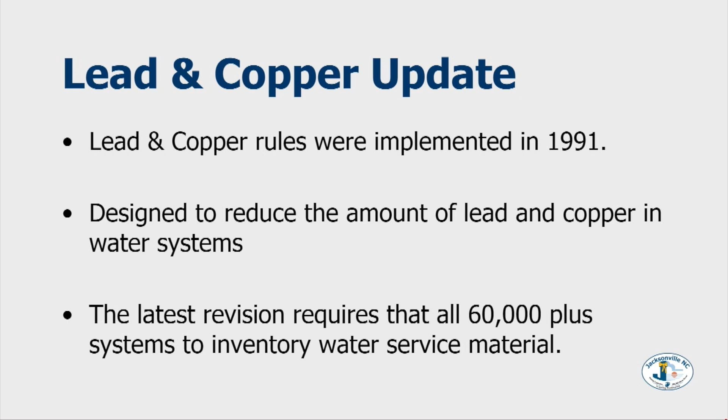What we're doing is going on both sides of the water service. Our service line would be from the street where the main is up to the water meter. So we're doing inspections on that section as well as on the homeowner's side. Typically what we'll do is excavate a couple of feet on each side to expose their water lines as well as ours to inventory what material it is.

And like I said, we're looking for lead and copper because lead has contaminants in it that stunt growth for children and cause learning development issues and so on.

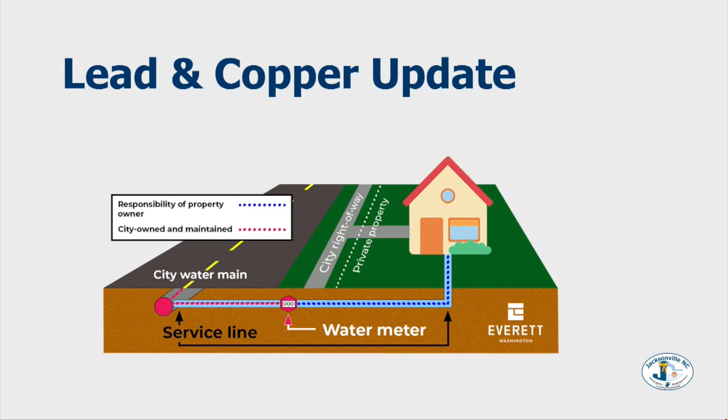So with TJ's example here, we appreciate Everett, Washington for providing such a great example. But in this example, it's important to note that we're checking both sides of the meter where we can easily get access, which is typically a grassed area. There may be a few where we have to go into pavement if the meter's right on the back of the curb or something like that. But what we're not checking is inside a house. So we can check our side of the line and there not be anything, but that doesn't mean a house built in the 40s, 50s, 60s, 70s, or early 80s doesn't have lead plumbing or lead solder inside if they have copper pipes. So it's still not a complete solution, but it will be better.

Also, since lead and copper affects children more so than healthy adults, we've made it a priority to check all of the schools, all of the daycares, and primary care clinics for youth and pediatrics, and get those out of the way so we know definitely, because it's more effective for the children.

So, does anybody have any questions on the lead and copper update? Answers are that. Thank you. All right, thank you, TJ. Thank you for having me.

Good evening. First thing I'd like to do is give you a quick rundown of the capital improvement plan. As you probably already know, it's a 10-year planning horizon for this next cycle, for fiscal year 26 through fiscal year 35. This plan is updated annually and is used for evaluating water and sewer rates.

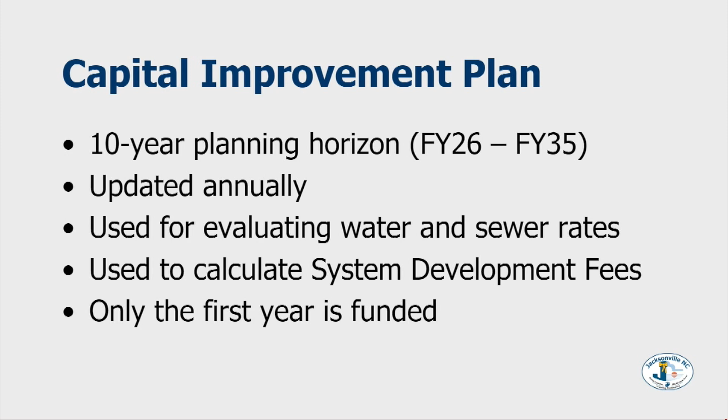What constitutes a CIP project? It's a project that takes longer than 12 months to complete. The cost exceeds $50,000, and its useful life is greater than 5 years. Replacement and repair is based on work orders, and new infrastructure and upgrades are based on growth and demand.

There are different types of CIP projects that we put in there. The first is rehabilitation, then improvement, as well as growth. Rehabilitation projects repair and extend the useful life of our infrastructure. They replace deteriorated infrastructure, keeping it the same size and capacity typically, and the source of revenue for those projects is from the monthly water and sewer rates.

Improvement projects also replace deteriorated infrastructure, reduce pressure on the existing infrastructure, and have the potential to add system capacity. They provide for existing and future development, and the revenue sources used to pay for those projects are monthly water and sewer rates, as well as system development fees.

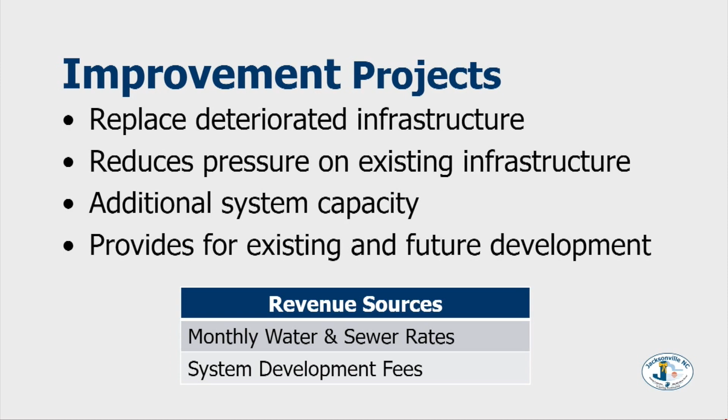Our third type of project is growth projects: new infrastructure, additional system capacity, and again they provide for future growth. The revenue sources for those projects are system development fees and water and sewer service area fees.

And what we're going to do now is go over the current projects update. Next month, we're going to discuss more of the next fiscal year's projects in the CIP, and then review a draft in November for any questions you all have, as well as to get any recommendations you may have. And now I'm going to turn it over to Randa, and she'll start off with water projects.

Good evening, all. You're going to see a lot that you've seen before, some maybe not, but the first project I'm going to discuss is the Black Creek Well Replacement Project. As you all might remember, this one was already designed. We had to go in there and do the chemical analysis, and we found fluoride. So we've had to put this project on hold while we look at other alternatives that are available. That includes evaluating some other wells and options, and doing a study for the new ground storage tank.

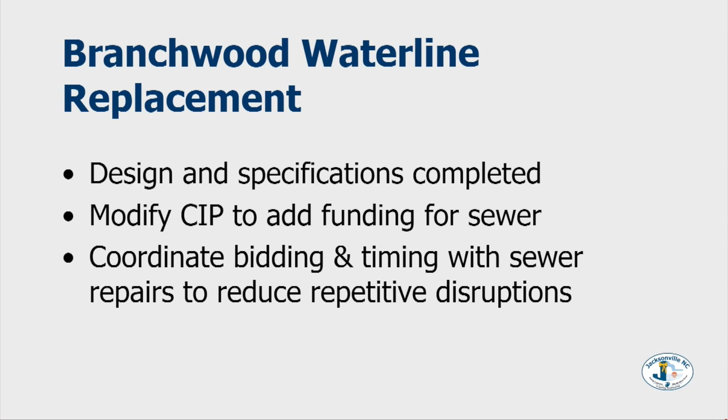Our Branchwood water line replacement project is to replace the water service lines out there in that area. We have it designed and ready to go. However, we also have some issues with the sewer infrastructure out there. So instead of tearing things up, coming out, and then having another contractor go in to do the sewer repairs, we decided we're going to try to coordinate that. We also need some additional funding in order to do that, so most likely it won't be until next year.

The challenge with that project is we would have gone in, replaced all the water service lines, left, patched anything that needed patching, left, gone back, made all the sewer repairs needed, patched everything, left, and then came back and resurfaced streets. So we would have interrupted that area's life a minimum of 3 times for extended periods each time. If we're going to do that, we might as well just disrupt their life one time.

Well, you say it costs you more, but if you do it 2 or 3 times, won't it add up to about the same, or even cost more that way? Well, it'll cost us more because, I guess you could argue we should get some economies of scale maybe, but a lot of it will be sub work anyway. And the challenge will be, instead of breaking streets up and getting to them over periods of time, we'll have to consolidate it all into one project. So it will be money we hadn't planned to spend on that area at that time. So maybe 'cost more' isn't the right way to put it. It just means we're spending more in an area that we weren't planning to spend that much on initially. Gotcha.

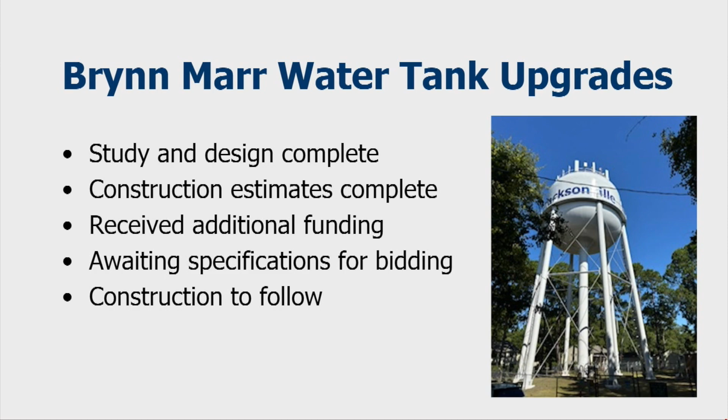This is the one we were talking about, raising it up higher? Yes, that's the one. It wasn't feasible, so we're putting in a booster station instead. That's why I mentioned the pump thing now. Yes, we still have the repeaters and all the phone equipment up there staying.

That's relevant. The bypass line cartridge filters project, everything's completed. The canisters have been ordered. It's under construction, and we're projecting this to be completed by November.

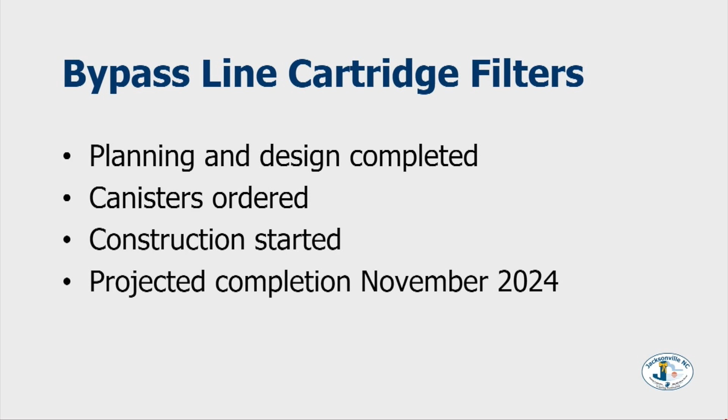Gum Branch Central chlorine scrubber: we received the proposals and the request for exemption on standardization purposes was approved. The scrubber was ordered, and we're expecting construction to start in December. I don't think there's any issues with that.

Next are our sewer projects and the Western Regional Sewer System project. This is the first phase, but we call it segment 2, the portion from LTS to 258. That's under construction. We were supposed to be finished by the end of this year, but I'm now looking at most likely late winter, early spring for that portion to be done.

The next phase of that force main, I have a notice to proceed for this month. They'll start clearing up by the Williamsburg Parkway, and then work through until they get through Burton Park, where the other part of that is at. We're expecting phase 2 to be completed by the end of next year.

The last contract for this one is the pump station and LTS upgrades. This project is going out to bid tomorrow morning. I'm hoping to have it awarded by the end of the year, and construction is expected to start in early spring.

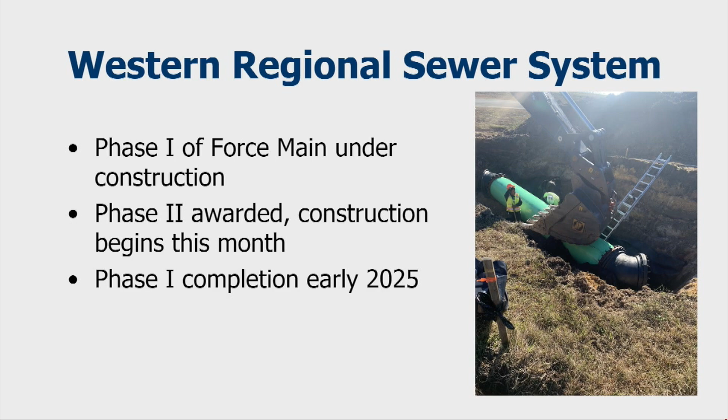Before we move on, this is the actual installation of the line. That picture's small, but compare the size of that pipe to the guy standing in the hole with it—we're going down Pony Farm Road, right through people's front yards. When people think of a sewer pipe, I don't think they're picturing this. Randa coordinates daily trying to get this installed. I wanted to point out it's not just a small pipe in the ground—compare it to the size of the guy standing beside it, that's a big pipe.

And even this one here, that's the casing—the pipe's actually 36-inch PVC, but this is the 54-inch ductile iron, or steel casing. That's what goes under 258.

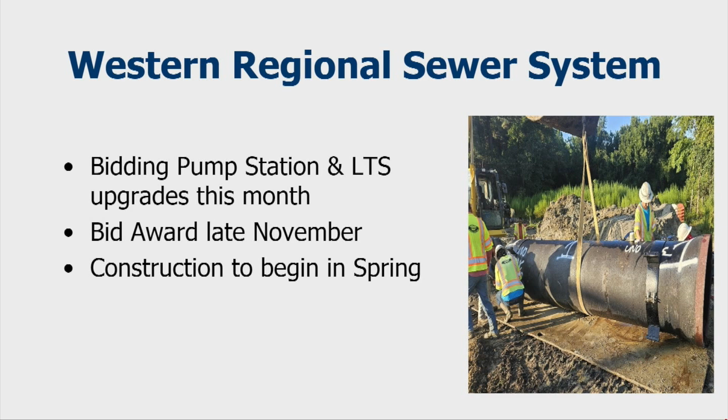The Holiday City lift station planning evaluation is underway. We're looking at alternatives and trying to finalize the design, so we also need to obtain some permits. We'll prepare the bids, and construction we're hoping mid to late winter.

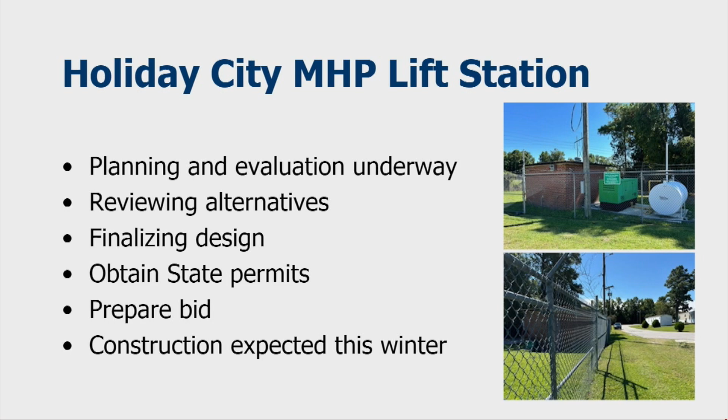The Shoreline Drive lift station elevation project was designed in-house. It's the watertight hatch—it's been ordered, however there's a 12-week lead time and it was just ordered. We're not sure if it'll be that 12 weeks, a little longer or a little less, but we're expecting it to be completed within the next few months, depending on when it comes in.

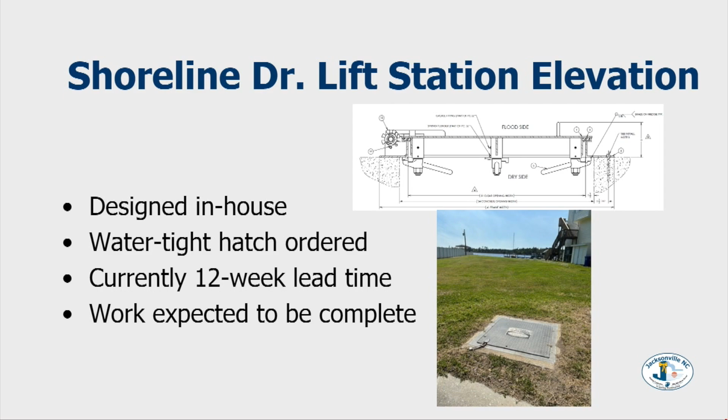For reference, you can see the river in the background. During a storm it'll actually come out of its bank and overtop this, which forces water directly into our system. And if you see the piece of concrete in the bottom corner, that's the curb for the roadway—this thing literally sits 2 feet off the side of the road. So we're trying to balance not letting water into our system, having good service, and doing what we can aesthetically for the neighborhood.

How high is the lift supposed to be again? Well, it'll be flush to the ground—it'll sit up about 6 inches high. Which will still get flooded, if... It'll get flooded, but it'll be watertight and dry. So the idea is it can handle the water pressure on top. And right now it can't—you can see it's just a little hatch.

The biofilter upgrade at Brynn Marr was another design done in-house. The biofilter has been purchased, and as you can see in the pictures here, the pad's been installed. The installation is expected this winter.

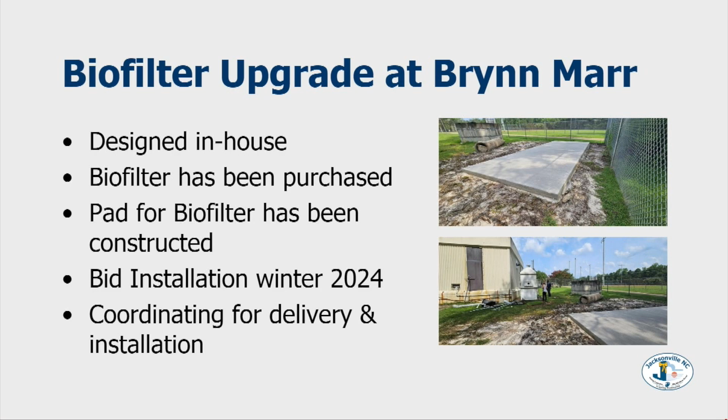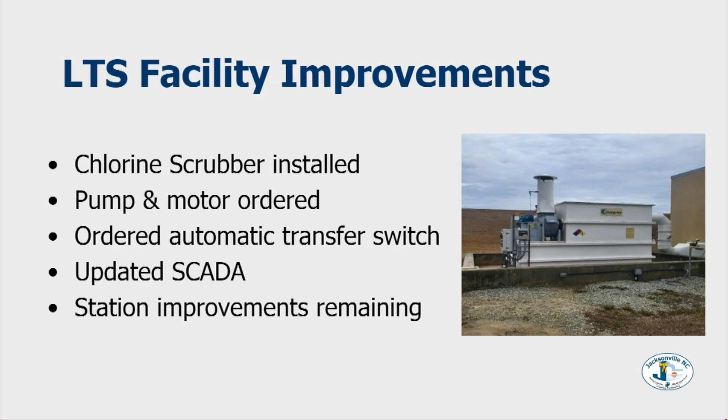For LTS facility improvements, the chlorine scrubber was installed, the pump and motor has been ordered, as well as the automatic transfer switch, and the SCADA has been updated. We've got some other stuff that'll be part of the pump station and LTS upgrades to coordinate with later, but other than that, the station improvements remaining, that's it.

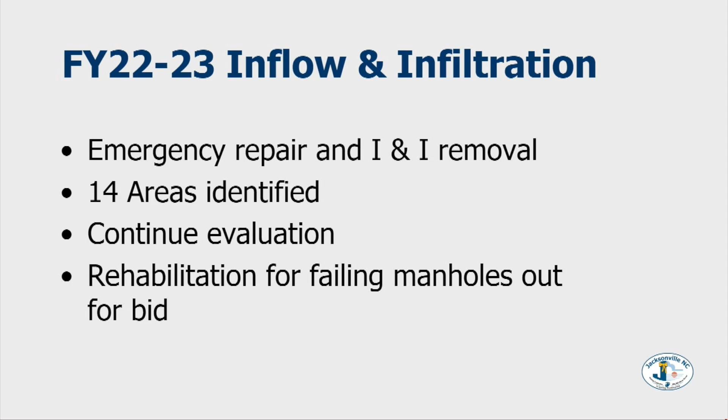Good evening. For the fiscal year 22-23 inflow and infiltration project, we had 14 areas that we identified. We're continuing to evaluate that and making a list. As part of that, we're also going to rehabilitate some failing manholes, which is currently out to bid. I'll show you some examples of what that will look like in the next couple of slides.

Part of our I&I project, we utilized funding with TJ's crew on Highway 24—I'm sure y'all probably saw that. It was about 1,200 feet of bypass pumping that the crew was having to maintain. In the picture on the left, you'll see the rings that fell during the failure process, and you can see the plastic catching in that sewer line. So they had to go in and cut out those gaskets and then ended up lining it, which is the second picture, where we lined those.

This next slide is an actual manhole we did on DeWitt Street, and that's what we're looking to do with the bid that's currently out—rehabilitating those manholes. Wally, did you want to talk about that process a little bit?

Sure. What's interesting about this process, and the reason we want to try it, is this manhole was set up and done in the matter of basically a morning—actually less than a morning. They went in, sprayed it, caulked it basically, and injected grout where we had water coming into the manhole.

Then they went through and used a three-part process—they did a liner, then basically a primer, then a coating that's several millimeters thick, and another polyurethane coating on top of that.

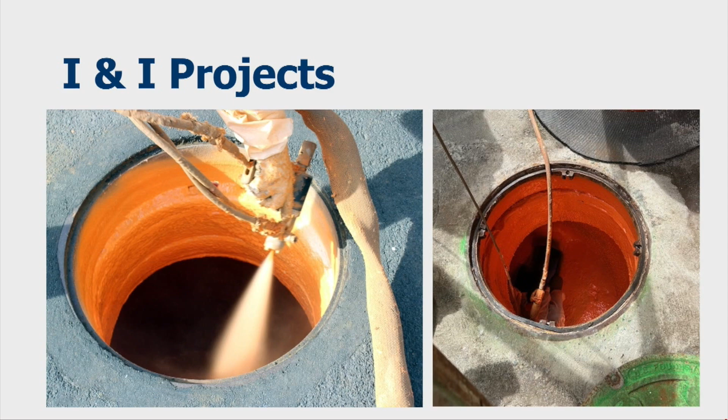TJ went in and had an emergency right before this was done, behind Platinum on 24. That manhole was 12 feet deep, I think.

And he had to replace it, and that manhole cost him $30,000, give or take. We had to set up bypass pumping. If we'd have found that manhole a little bit sooner, before that one actually started caving...

If we would have found it, we could have used this process and never had to spend that money. So our goal will be to have our I&I project include a recurring manhole project. What we found is we do a really good job of lining, but that doesn't address the manholes. So this will be a separate project, still part of our I&I effort, to address manholes. And we have a lot of manholes in the city that are actually brick.

I wanted to go back to this one for a minute to point out, this was Highway 24, this is inside the pipe. This is concrete reinforced pipe. The challenge here is the Ellis Lift Station dumps into an upstream manhole of this gravity sewer, so one of the challenges we have in this area is hydrogen sulfide gas.

And the problem is it likes to eat concrete. Here's kind of the proof. If you look at the top, you see this thing that looks like a railroad track or a ladder. That's actually the steel reinforcement inside the concrete pipe. So the top couple inches of concrete have actually eroded off, which then fall into the sewer as sand, which creates blockages and impediments.

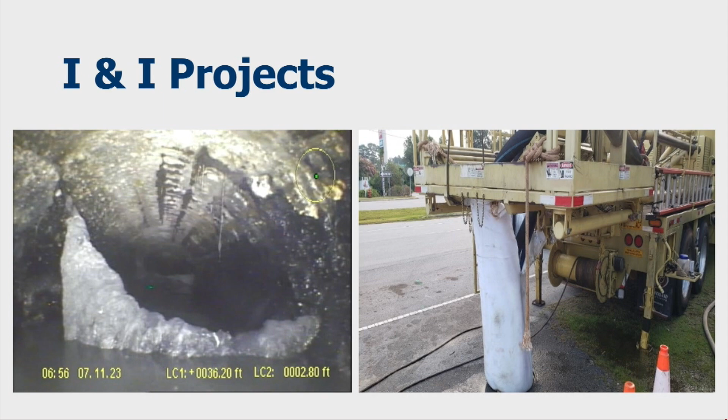And then, as Christy talked about, the ring that fell with what looks to be plastic hanging up. If you look past that one, you'll see another one. It was literally at every joint. What happened is the concrete pipe failed to the point where, when the pipe is pushed together, there's a rubber gasket there. The inner concrete failed, the rubber gasket fell into the pipe, and that's what was grabbing it.

So we actually had a sanitary sewer overflow because of this, which is how we were able to find it. It just shows the importance of our I&I efforts, and it's a good way to preemptively go in before we have immediate failures that we have to address through emergency.

All right, next we have the Mill Avenue sewer replacement. This design is complete, also designed in-house, and we are preparing to put this out to bid. We would expect construction to begin in spring of 2025.

Any questions on the I&I or water and sewer projects? Now this will be a hot topic, I'm sure.

The New Bridge Streetscape infrastructure - I first want to talk about some of the challenges we've run into with this project. Just down from Boomtown Furniture, on that same side of the road, we came across 3 underground fuel tanks that were not abandoned properly. So obviously we had to do the remediation removal, which we utilized city staff to do, dispose of those properly, as well as the unsuitable soils. So we got rid of that.

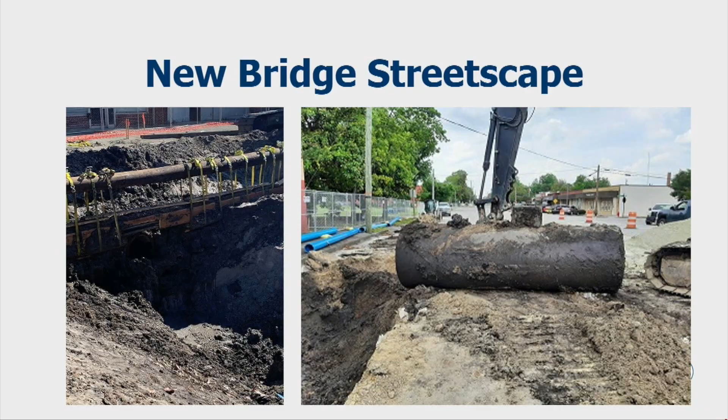This first picture here, actually, we were 16 feet underneath that terracotta pipe with the storm drain. So every time we cross that, which will be 4 times with this project - we've completed 3 of the 4 so far - we have to have a 50-foot pole laid across it, and then we brace it to hold it while we're digging underneath. So obviously we have to expose a lot of the soil to get the storm drains down there, and it's a process.

So that's 2 of the challenges we've had, as well as every one of the businesses - we are going right up to their doorway entrance to install new sidewalk. If you've been down New Bridge Street, you know none of the entrances are the same. Some of them have been remodeled, built right on top of the old sidewalk. So every storefront is a case-by-case basis.

But I have to say, those business owners have really been patient and understanding during this process, and I appreciate it a lot. I try to stay in contact with them on a daily basis, but we are looking to hopefully have this completed at the end of the year.

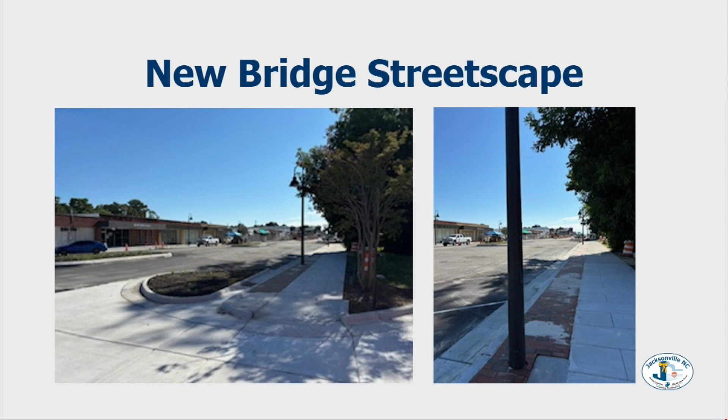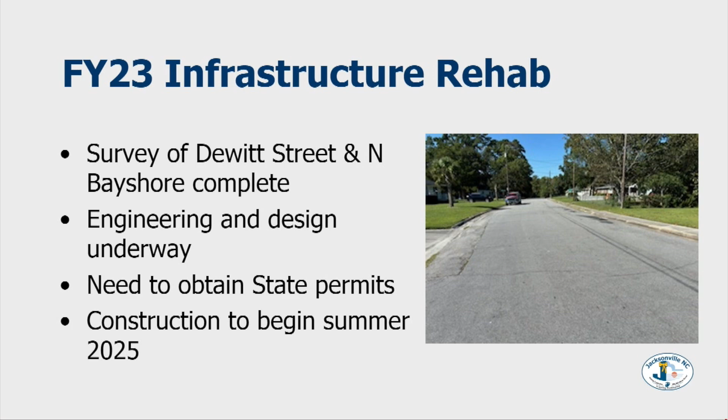The fiscal year 23 infrastructure rehab, the survey of DeWitt Street and North Bayshore has been completed. This design is underway. We will have to obtain state permits, and one thing I always like to bring up is that sometimes we're not in control of how long that takes. So it may delay us getting construction started, but we're looking to begin this summer of 2025.

But DeWitt Street's gonna be a challenge, isn't it? It is, yeah. It's the worst street in the city. It's going to need water, sewer, and possibly even some stormwater repairs and replacement to get that street where it needs to be so we can resurface it. And it's highly traveled. We'll have to figure out a detour plan for that street because some of the work will be right in the middle of the street. So it'll be an interesting project.

But it's necessary. US 17 North Drummer Kellum Water and Sewer Extension. This design is complete. We have obtained the state permits. We are in the process of getting the NCDOT encroachment agreement, and we expect to bid that within this month, with construction to begin January of 2025.

Turn it back to you, Roy. Okay, all right, so next steps.

Next month, we're going to discuss future projects, new projects that have been submitted by different departments throughout the city. At that point, we'll finalize the draft of the CIP. We'll do a rate analysis, adjust any programmed projects that we have, and then we'll present it to you for your support. That will eventually be presented to City Council for approval and adoption.

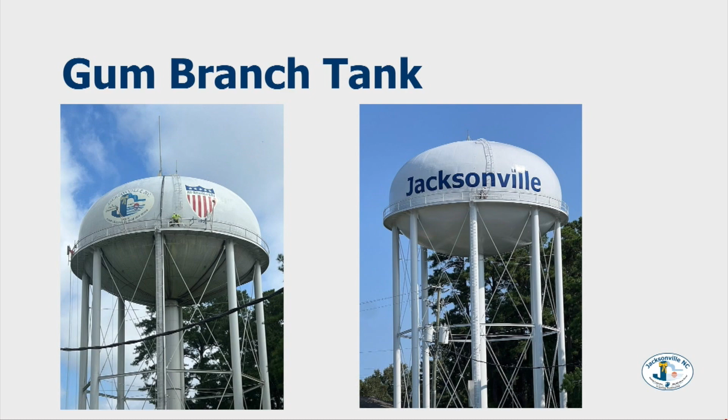Well, we have one other item for you tonight. If you've driven over by Jacksonville High School here lately, you might have noticed some work going on in the water tank over there behind that Walgreens. In fiscal year 25, we brought in our final elevated water tank into the asset management program under USG, and they have just completed the exterior renovation. So it looks sharp. If you haven't had a chance to get over there in that area, I suggest going after school, because that intersection can be kind of nuts with the kids running around.

But very proud of it. I think it looks great. There were a bunch of old antenna cables up there that were also removed, that were no longer needed or no longer in use. So it looks a lot more clean up there. So they have an interior renovation as well on that, but that concludes our elevated water tanks.

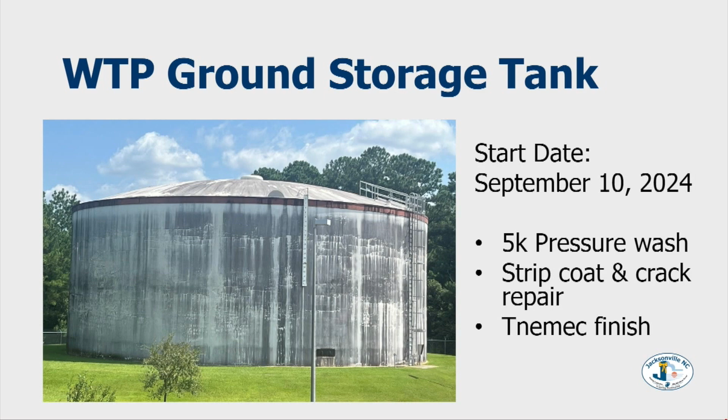And the crew was able to move from this project right down the street to the water treatment plant ground storage tank, where they are completing, well, they just started a couple days ago, the exterior renovation of the concrete ground storage tank. So we expect them to be done with that by the end of the month. It won't look quite the same as the elevated water tank because we're going to paint it to match the exterior facade of the water plant.

So it's going to be more of a beige when they put that final finish on it. But what they're going to do there is more than a pressure wash, more than your standard pressure wash to clean all that off. And then they're going to go through and strip coat and crack seal before they put that final protective coat on there and add a little bit of color. So that should be completed by the end of this month. We're pretty happy with that progress.

Good. Beautification is always important. Yeah, you might not see this one as much. Maybe as that area develops, you might see it a little bit more, but not too many folks have a reason to go down that road right now.

I have one other thing I'd like to share with you. We get calls periodically about leaks that have been out there for extended periods of time. We prioritize repairing leaks based on the amount that it's leaking, the damage to either private property or public infrastructure that the leak is causing, and when we can get locates, when we have staff available, and when we have materials available.